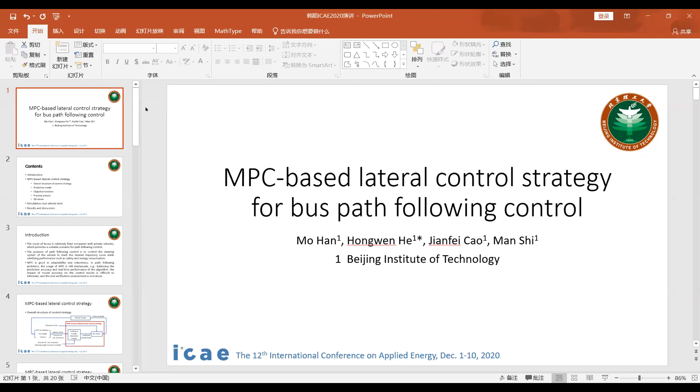Okay, hello everyone, good afternoon. I'm Mo Han, I'm from Beijing Institute of Technology. I'm now a doctoral student, and it's my honor to give this speech and discuss with you about my research. The topic is MPC-based lateral control strategy for bus path following control.

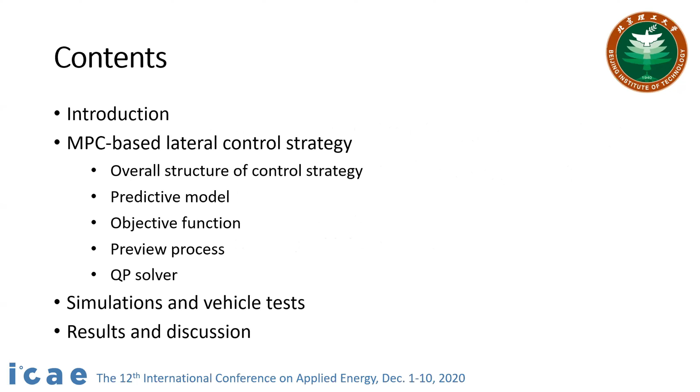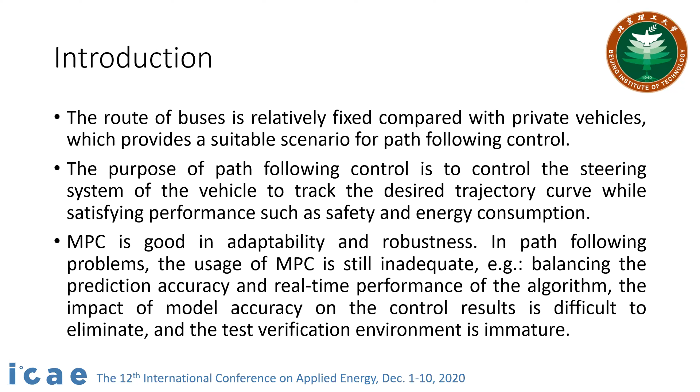The speech is carried out in 4 parts. Firstly, the introduction of the research topic. The route of buses is relatively fixed compared with private cars, so this provides a suitable scenario for path following control. The purpose of path following control is to control the steering system of the vehicle to track the desired trajectory curve while satisfying performances such as safety and energy consumption. An MPC method is good in adaptability and robustness.

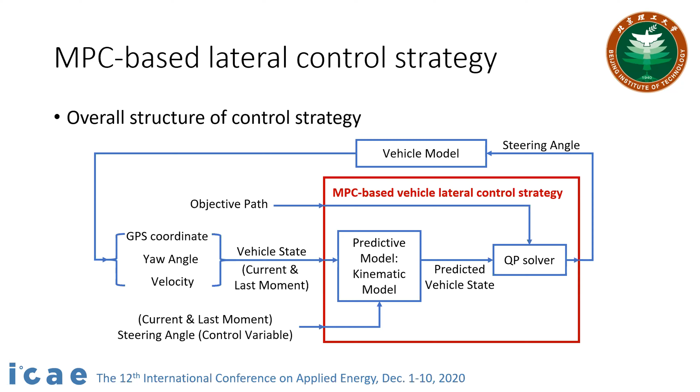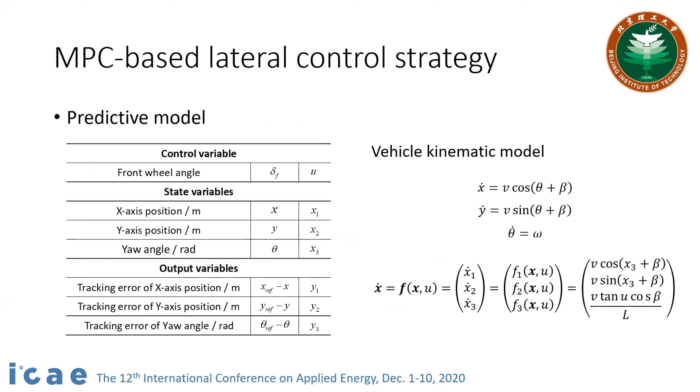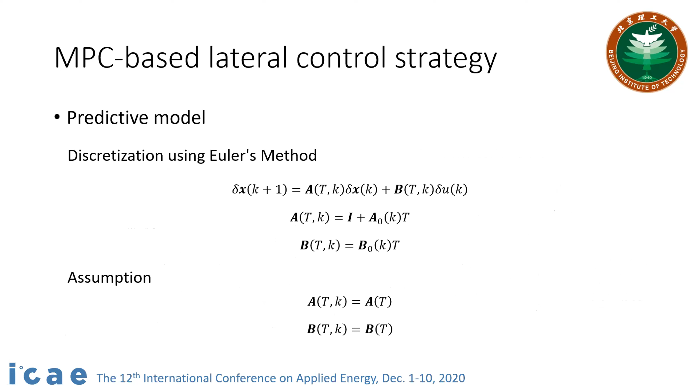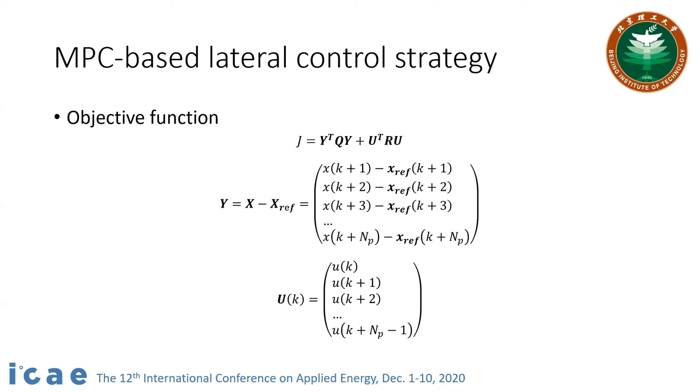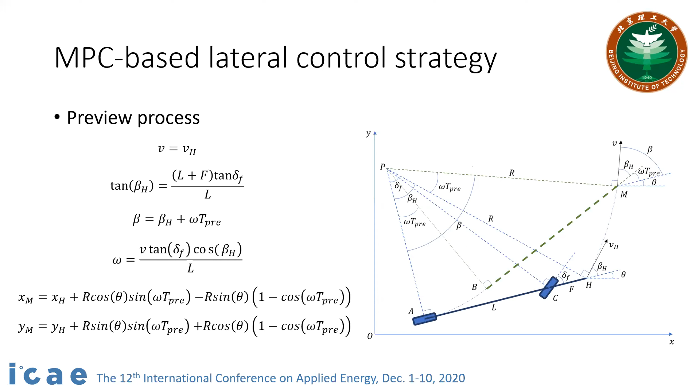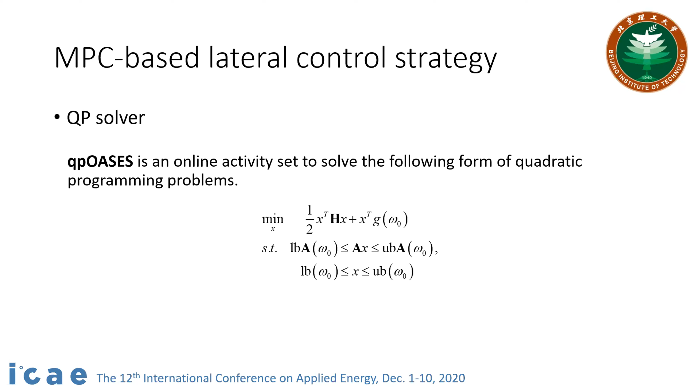We use qpOASES to solve the following form of quadratic programming problems. Simulations based on MATLAB, Simulink, and TruckMaker platform are conducted. The vehicle model in TruckMaker is close to the real vehicle. Thus, the simulation results are used to study the effects of the change of parameters.

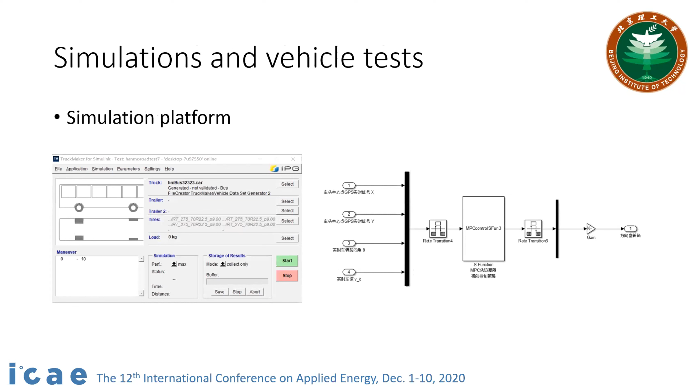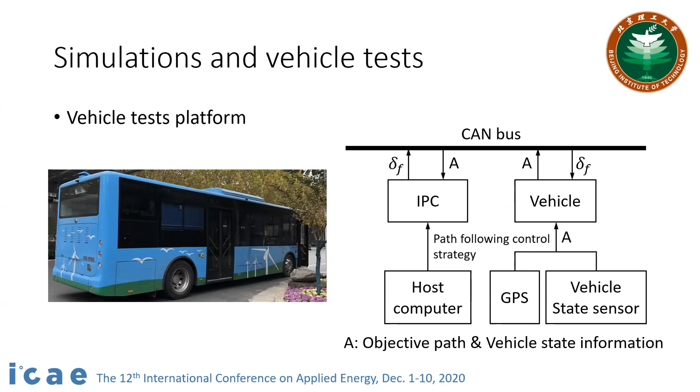Here's the structure of the simulation platform. The lateral control strategy is wrapped in an S function. Vehicle tests are conducted to verify the effectiveness and real-time performance of the control strategy. This is the structure of the vehicle tests. Two scenarios, including straight line and right angle turn road, are designed.

We assume that the friction coefficient of the road is 0.8. Different velocities are simulated in the simulation platform and vehicle tests. The tracking errors for each condition are listed in this table, and we can see that the tracking error is lower than 10 centimeters in all conditions. This is the results for the simulation platform.

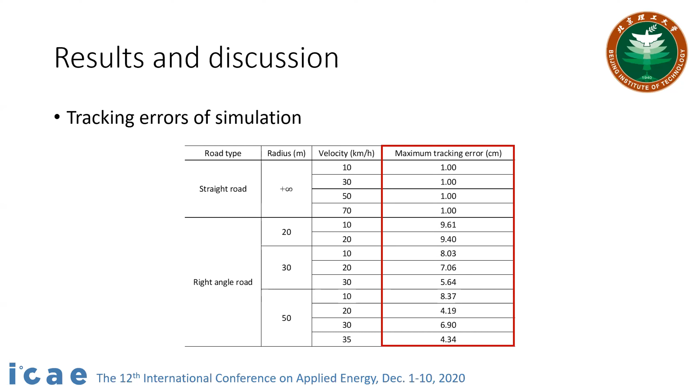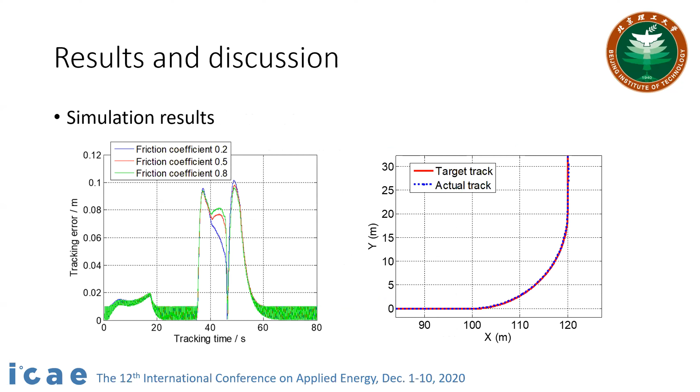Take the 20-meter radius right angle turn with a velocity of 10 kilometers per hour as an example. The tracking error of different friction coefficients is shown in the left figure, and the tracking result is shown in the right figure. We can see that the maximum tracking error is about 0.1 meters.

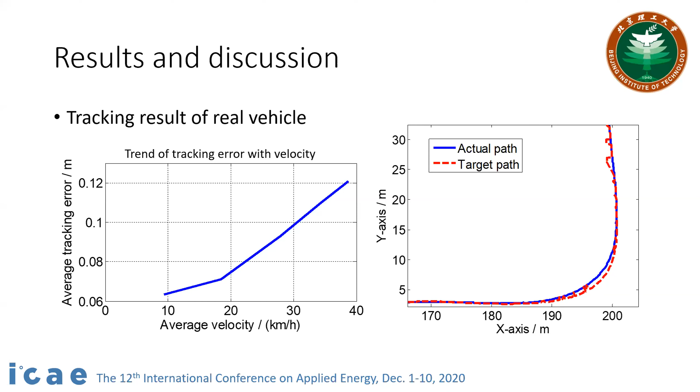For real vehicle tests, in straight road conditions, the tracking error grows with the increase of velocity, as can be seen in the left figure. The tracking results of a right angle turn with velocity of 15 kilometers per hour are shown in the right figure. The target path is not smooth. The red line is the target path because there are some noises in the signal. However, the vehicle can follow the path smoothly despite the noises.

The proposed vehicle lateral control strategy can realize a reliable and stable tracking action. The preview method can help reduce the tracking error. In real vehicle tests, due to the noises in the target path, the tracking error will reach a higher value than in simulations. The real-time performance can be verified according to the real vehicle tests.

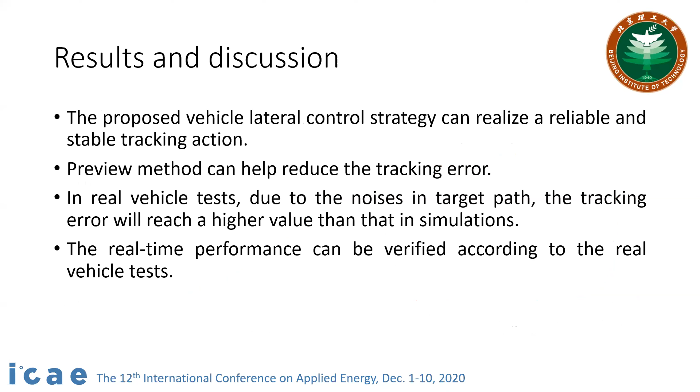In conclusion, an MPC-based vehicle lateral control strategy is proposed in this study. The prediction step of MPC needs to be reduced with the growth of vehicle velocity, and the reliability and real-time performance is verified. The tracking error is within 15 centimeters in simulation platforms. And here are the references.